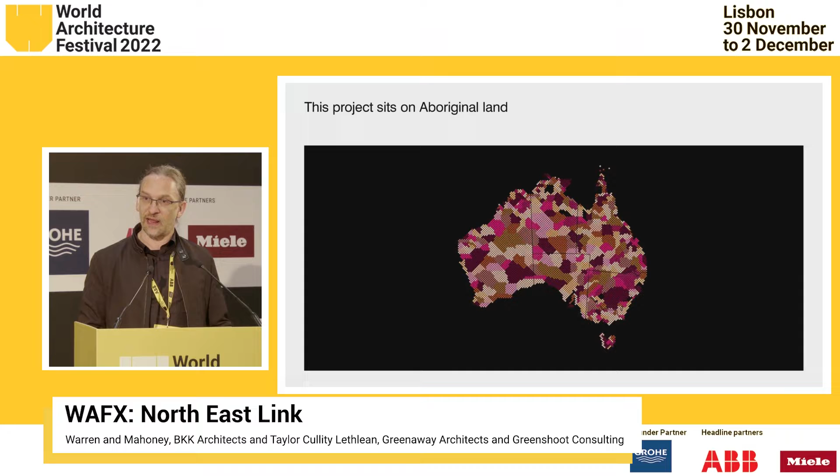This project is located on the unceded sovereign lands of the Wurundjeri people of the Eastern Kulin Nation, what is now known as Melbourne. This project connects us to the oldest continuing living culture on the planet. Importantly, it's an exemplar of how we engage with Indigenous knowledge systems translated through meaningful design action, and it will be a benchmark of how we embed it through infrastructure which empowers community.

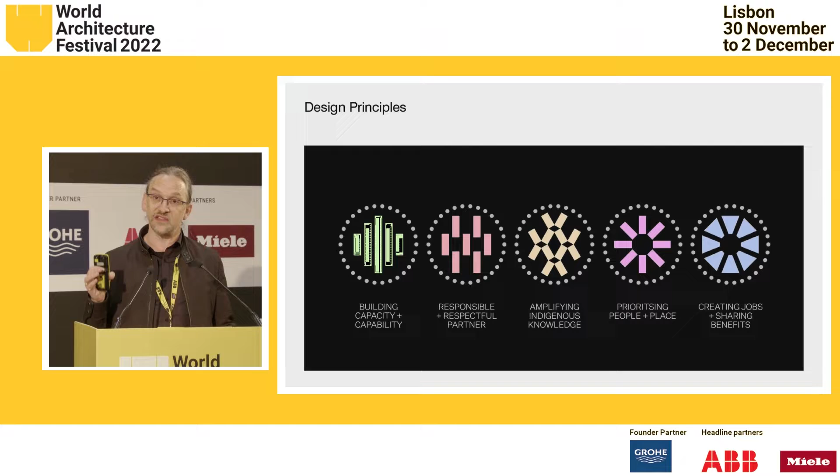The way we organised this project was to set in train a series of guiding design principles. Importantly, what it seeks to do is facilitate agency, reciprocity and mutual benefit through building capacity by being a respectful partner with the traditional owners, elders and knowledge keepers we engage with, by amplifying Indigenous knowledge systems with an authentic connection to place or country as we define it, and sharing in the benefits of what this enables.

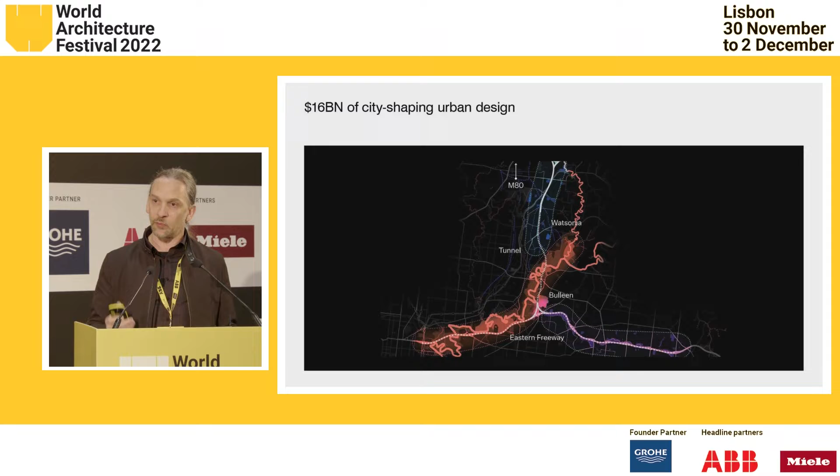This is a significant project. It facilitates reconciliation at scale by stitching together some of the missing infrastructure needs of the city north of Melbourne. You can see here the vastness and the scale of this intervention. But what it enables is the potential of how we engage within communities, providing meaningful benefit through these significant propositions.

The way we organised this was around these principal key pillars. These were co-designed with 4 traditional owner groups, working in close collaboration with our terrific partners from Greenshoot Consulting, and it focused centrally on these domains.

The first one is connecting to country. Country is viscerally connected to language. It's also connected to the landscapes and the meanings and the memories of place. Importantly, caring for country is about repairing, remediating, restoring the degraded landscapes and ecologies, but also embedding sustainable design practices in all that we do, knowing that we operate within a social licence and contract.

Connecting to people is understanding the significance and importance of our role as practitioners in the built and natural environment to bring communities together in all that we do with these projects.

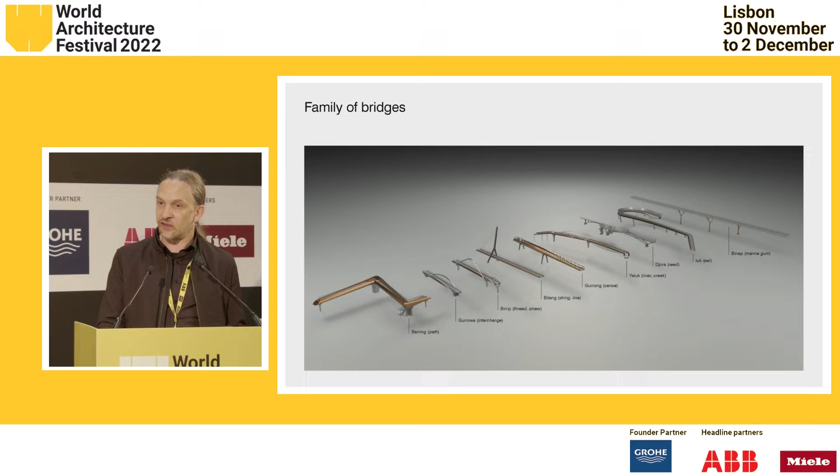The way we really sought to harmonise the relationship to the landscape was to touch the earth lightly, to cross this important watercourse, the Birrarung, the River of Mists and Shadows, or the Yarra River as it's better known, and start to understand the importance of the movement patterns, the circulation, the shared user paths in parallel to this infrastructure.

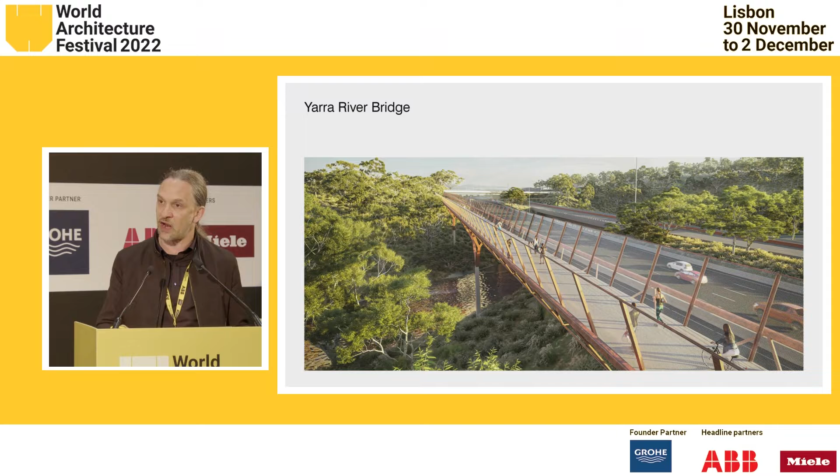So I'll now hand you over to Scott, who's going to talk you through some of the signature moves as it relates to the design and how we use these pillars to underscore all that we've done.

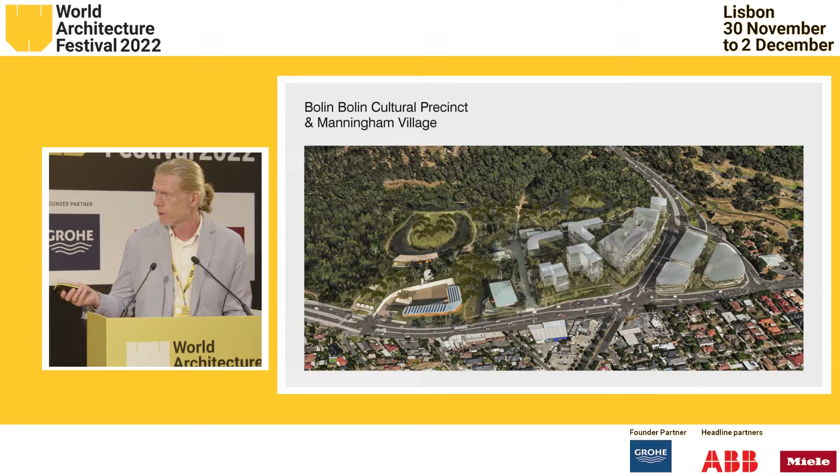And by doing this, we could then create a cultural centre for Wurundjeri, which would enable them to allow the broader community of Australia to connect back to country, to understand the principles about what Jefa once described to me as a reciprocal relationship. We are part of country, country is part of us. If you look after country, country will look after you. There's no difference between nature and culture. We are part of country.

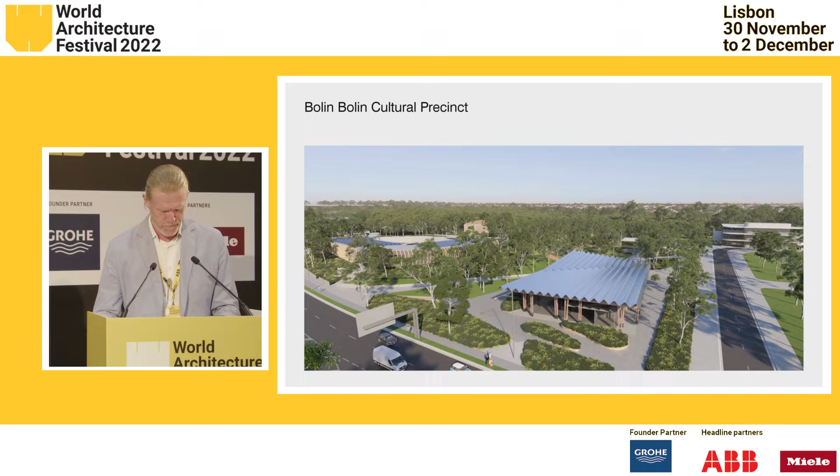Another part of the project was Koonung Creek. Koonung Creek is a waterway that Wurundjeri would have followed for thousands of years. It joins the Yarra River. But in the 1980s, the Koonung Creek got put underground in a pipe in order for the expansion of the Eastern Freeway. Our project enables us to bring the Koonung Creek back to the surface.

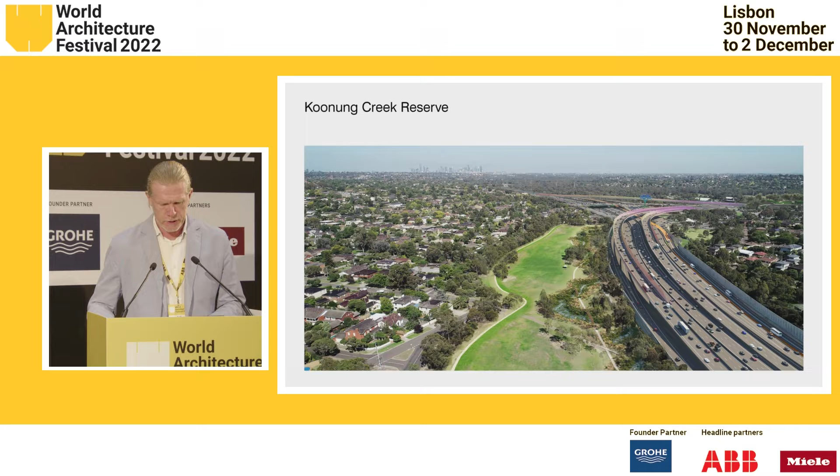To allow this ancient water to flow once again on the land surface, to create a green corridor, to restore an ecology, but to recreate a culturally significant landscape and a waterway for the Wurundjeri people, but also a fantastic upgrade and improvement for the local park for the local people. The Koonung Creek section which we daylight runs for about 3 kilometres.

And where the Koonung Creek joins the Yarra River is the point of the confluence of the Eastern Freeway and the new tunnel section, where the portal has to come out and join with a multiple braid connecting into the road system of the Eastern Freeway.

Now, we saw the opportunity to create a land bridge, an engineering structure that ties over all the portals. But most importantly, what it does is it carries the ecology of the Koonung Creek over the road and back down to the Yarra, where it always wanted to be, where it's always connected, where the Wurundjeri have always walked for thousands of years. But it also reconnects the sports fields, it reconnects the communities.

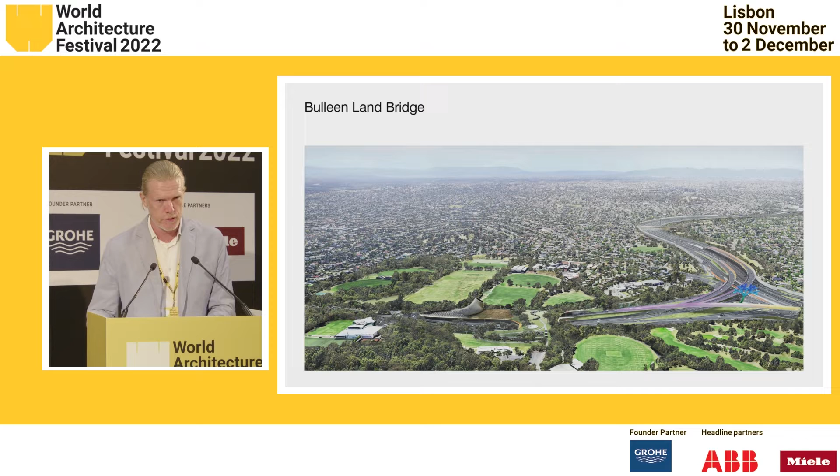And what the land bridge does is it breaks the severance that infrastructure often creates in cities. Again, based on these ideas of caring for country and connecting to country.

Incorporated into the land bridge, we worked with the engineers on the land bridge itself. Underneath the land bridge is the vent station, all electrical power stations that are required to control the fans and the lighting for this 7 kilometre long new tunnel. There is a vent stack required to extract the gas.

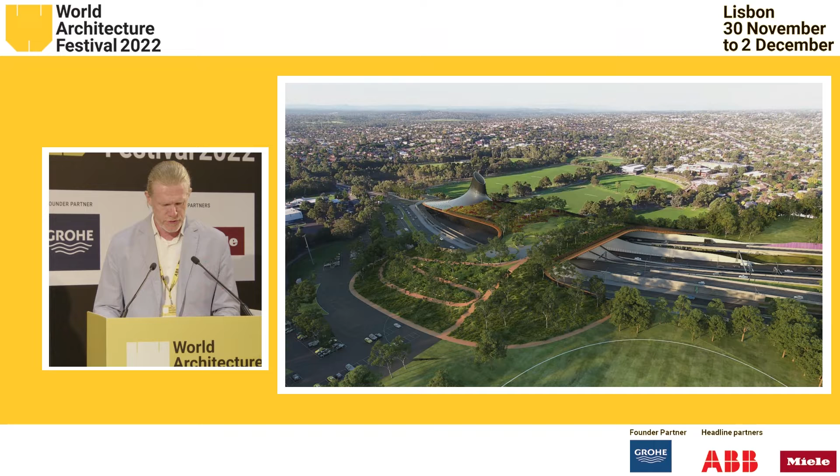We convinced the engineers to cloak this vent stack, along with many other noise walls and elements within the project, with photovoltaics. These solar panels cumulatively generate 17 megawatts of power at the peak period of the tunnel's demand and feed this power directly behind the meter into the tunnel, the most efficient way to use the power. Again, based on this principle of caring for country.

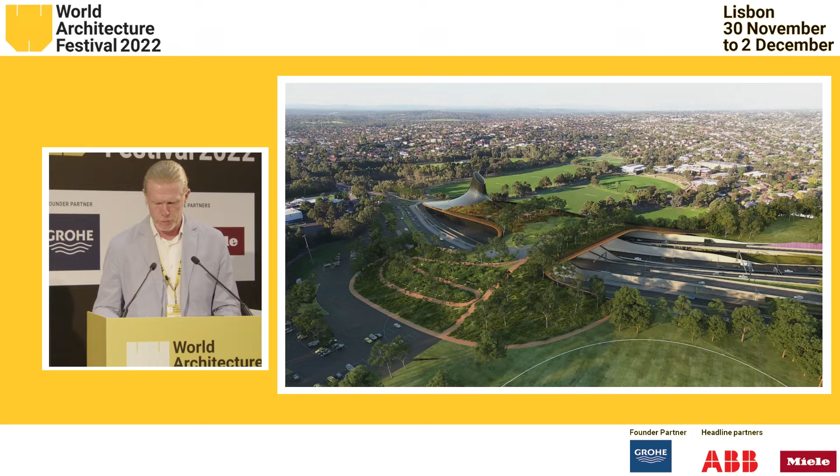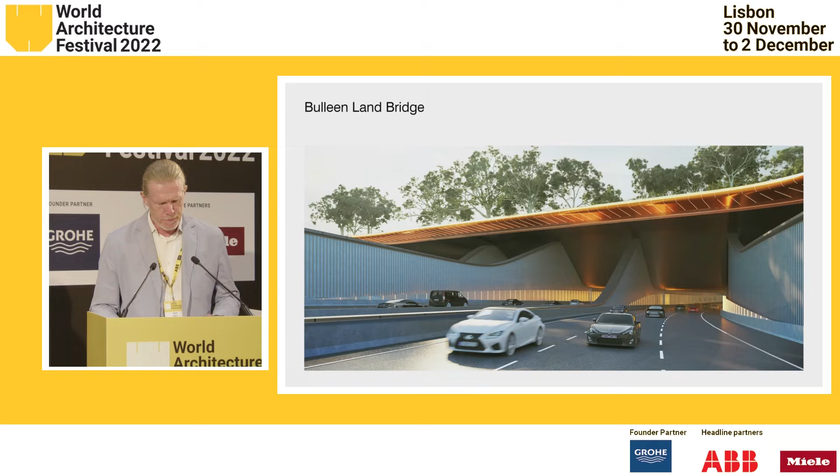But this land bridge is also something that makes sense of the portals. It's a structure that ties them all together. It's a structure that creates a hill, a landscape. It enables us to enter into country and travel into country at the start of our journey. It becomes the landmark, the gateway moment for this project. It's important that it puts landscape over infrastructure and reconnects country.

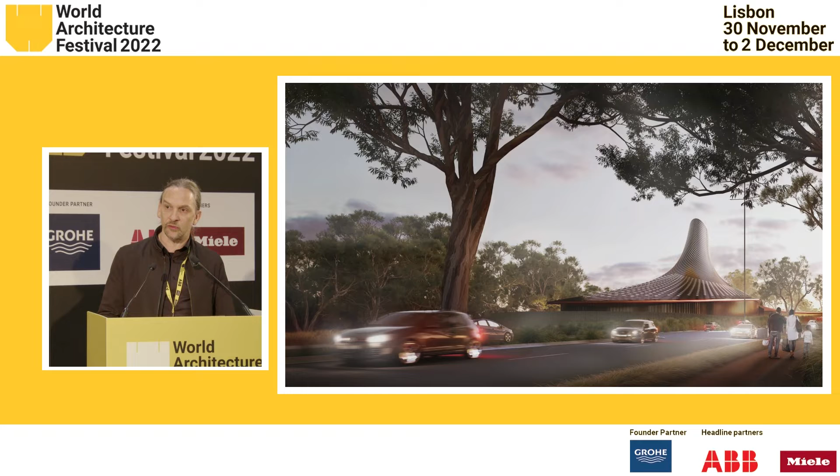So significantly, this project is a catalyst for meaningful cultural change. It draws upon 67,000 years of continuous connection to this place, and it provides a moment in time of how we start to embrace the opportunity of embedding Indigenous knowledge and Indigenous design thinking into the very DNA of how we think about projects, manifested through meaningful design action.

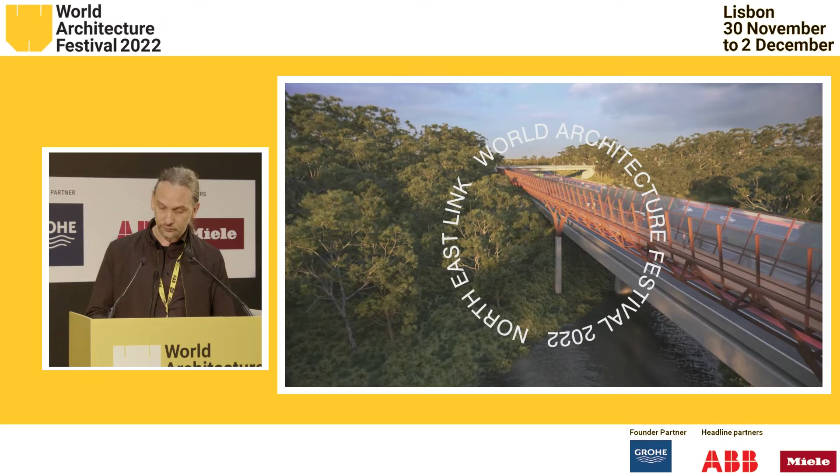And this series of images here gives you a sense of the breadth and scale of this project.